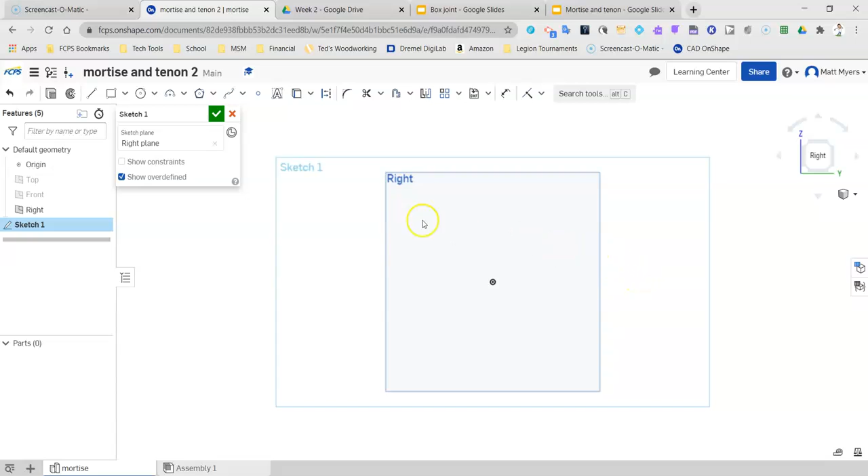To get started, I'm going to create a sketch on the right view. I'm going to hit sketch, and hit the right view, and hide my top and my front. I'm going to right click and hit view normal to sketch plane. Once I'm viewing my right view, I'm going to use my rectangle tool to draw the outline of my mortise joint, which is going to be 10 inches long and 3 inches in height.

Once I do that, similar to how we created the box joint, you're going to need to offset your outer lines of your mortise. To do that, you're going to hit O on your keyboard, and you'll see the offset tool lights up right here. You're going to offset the top and bottom by 1/4 of an inch.

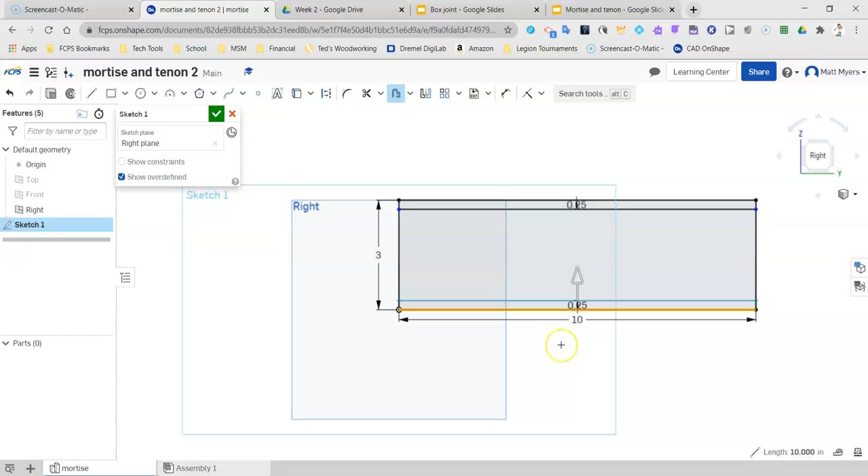So you're going to click on the top, hit Enter, and it's going to ask you to specify the dimension. You're going to hit Enter again, and then do the same thing to the bottom, except we need to flip the direction this time. Hit Enter, it's going to ask you to specify the dimension. Just hit Enter again.

And then what we need to do is specify where the mortise is going to be in relation to our ends. So we're going to offset the end by 1/4 of an inch, and that is the start of our mortise. Our mortise is going to be 1/2 inch wide, so I'm going to offset my end line again by 0.75.

Whoops, went the wrong way on me. So I'm going to hit O again, hit Enter, 0.75. And there we go, so this piece in here is our mortise.

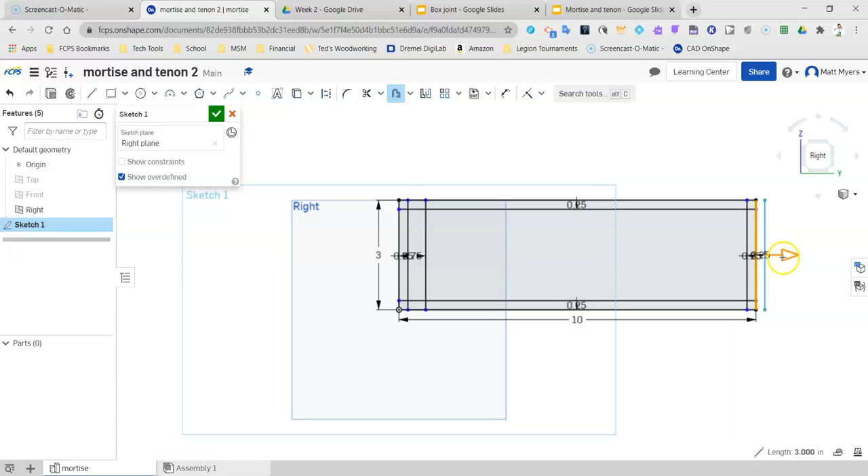I'm going to do the same thing on the other side. I'm going to click once, Enter. We're going to hit O again, offset this side, specify the dimension, 0.25. Then I'm going to offset the end again, flip the direction, and then 0.75.

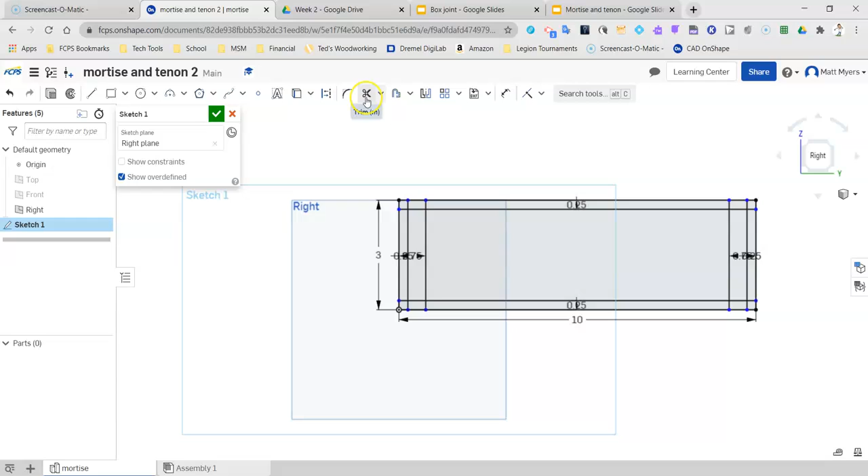So both of these areas are my mortises. The final step to do this, I need to trim out the lines that I'm not using. I'm going to hit Trim, which is this button up here, or my keyboard shortcut, which is M, and trim the lines that I'm not using. So now you will see that I have the outer shape drawn, and I also have my mortises drawn now.

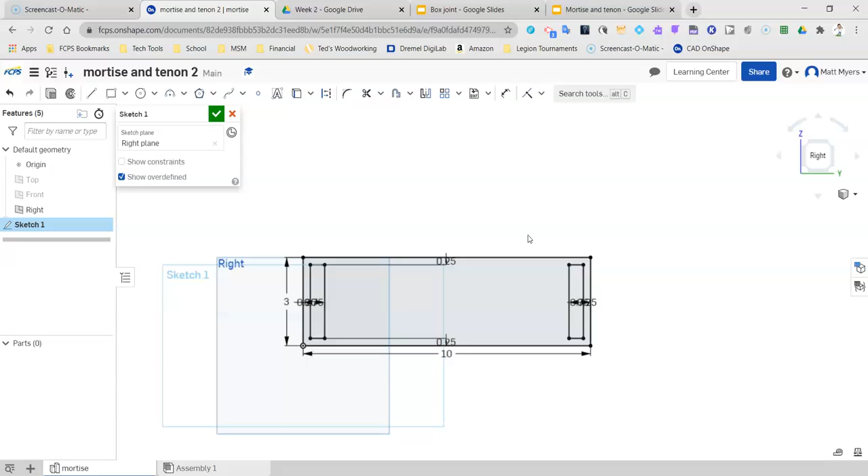So my sketch is complete. I'm going to confirm my sketch by hitting the green check, and then right click and view isometric. Now I need to do 2 separate extrusions here. The first extrusion I'm going to do is extrude this by 1 inch, and then I'm going to extrude this by 1/4 of an inch.

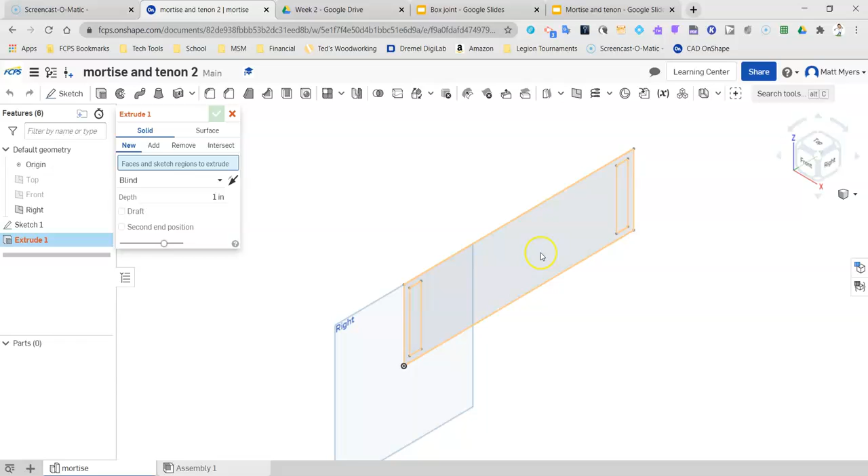So I'm going to extrude this by 1 inch, and hit Enter. Then I need to extrude - I'm going to hit so I can view sketch 1, hit that again, and then I'm going to extrude this part and this part. I'm going to extrude by 0.25.

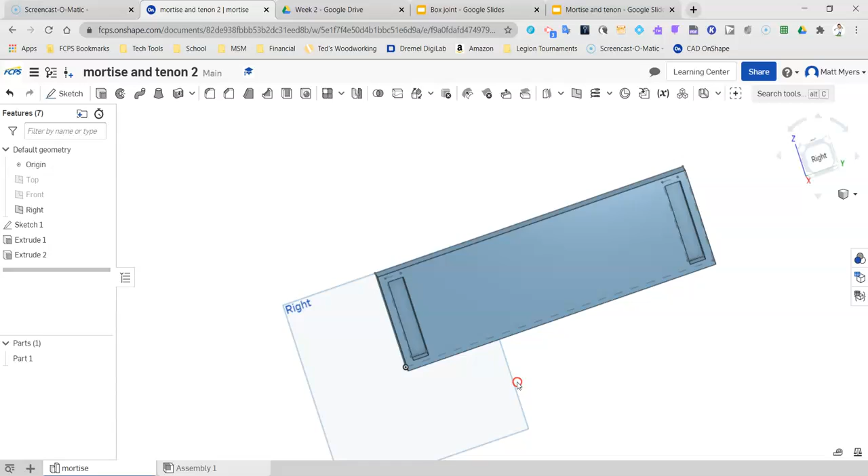Now if you view in there, you'll see that my mortise is cut out, and I know that the distance between the opening to the back of my mortise is going to be 3/4 of an inch. So there is my mortise.

Next I'm going to create my tenon. The tenon is the part that will go into the slot I just created. So I'm going to hit Insert New Element, Create Part Studio, right click and rename it tenon.

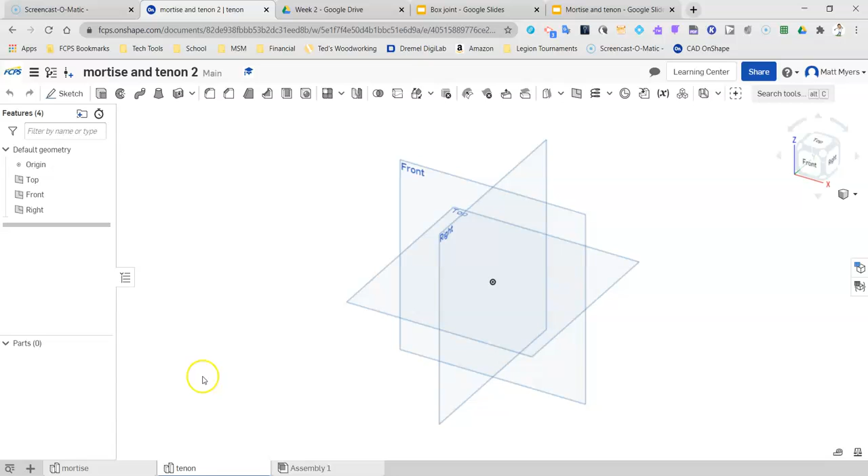This time I'm going to create my sketch on the front view. So I'll hit Sketch and Front, right click, View Normal to Sketch Plane, and hide my top and right side. I'm going to use my rectangle tool to draw the outline, making it 8 inches and 3 inches.

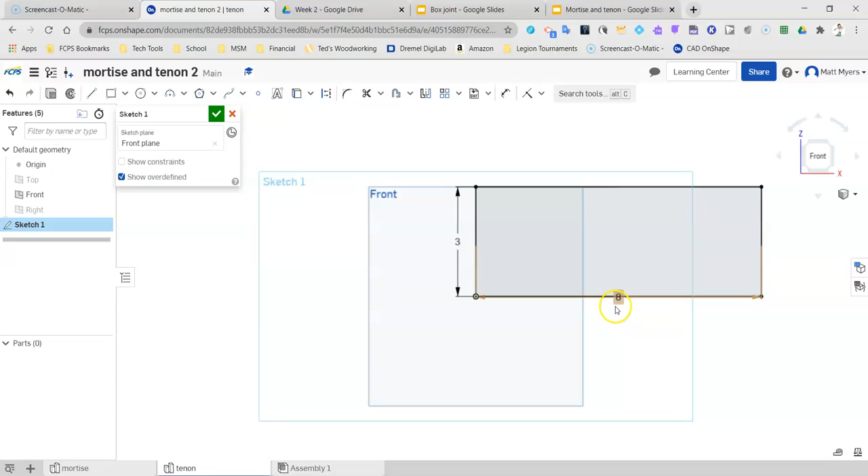I need to offset my lines, my top and bottom, to line up with my mortise joint. So I'm going to hit O, and offset by 0.25, since that is the start of my mortise joint.

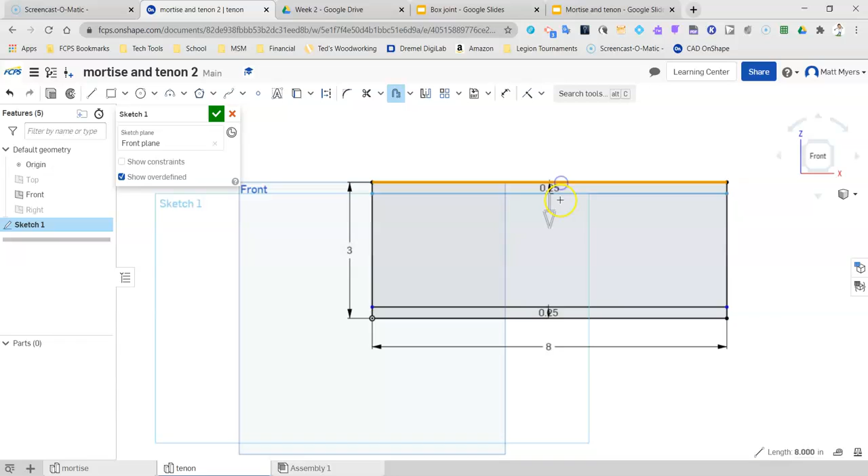Then I'm going to take my line tool and draw my tenons from where the points are that I just offset. My mortise is 3/4 of an inch deep, so my tenons are also going to be 3/4 of an inch, so they will fit perfectly. I'm going to draw a line that is 3/4 of an inch long, and it's going to come up to the top of the point I just offset.

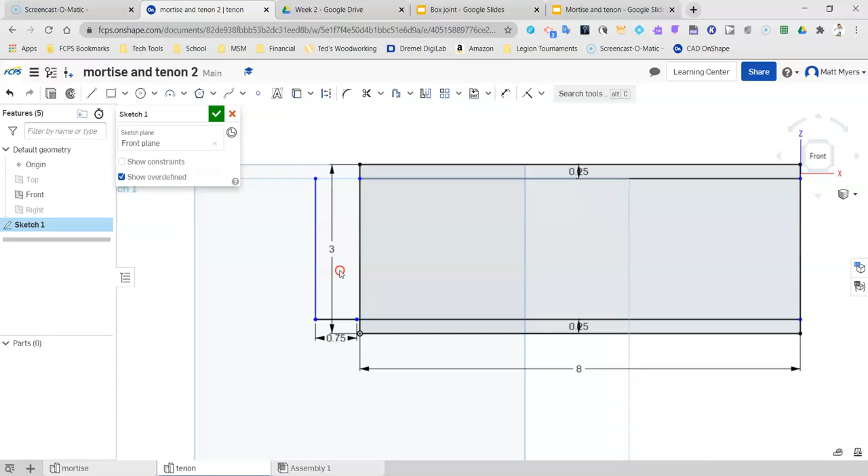Whoop, I messed up there. I did not connect my points, so let me go back and redo that.

Alright, so now we're back to square one here. I'm going to take my line tool and draw my line from the point that I offset, and it's going to be 0.75 inches long.

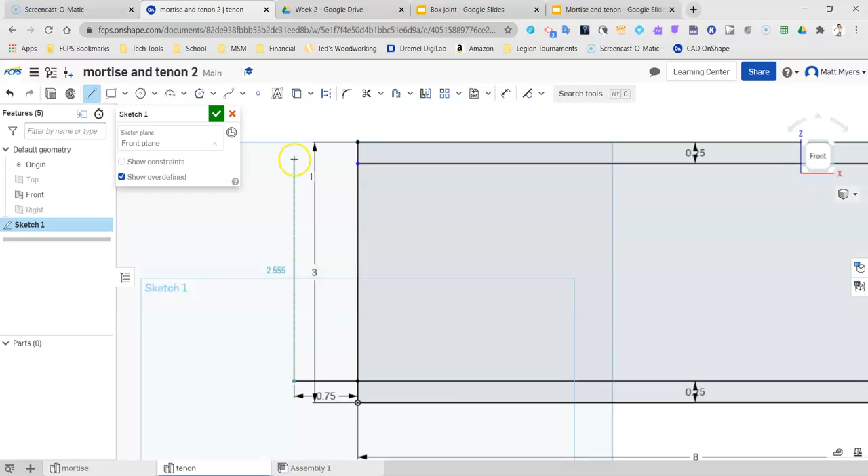And then I'm going to do the same thing on the other side. Take my line tool, start from the point that I just offset, 0.75, and come up to the point that I just ended on.

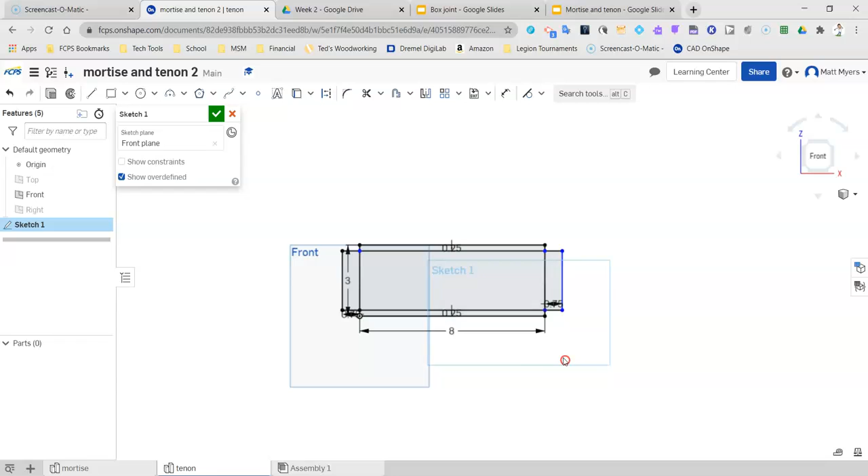The final thing I need to do is trim up the lines I'm not going to use. So I'm going to hit M, which is a shortcut for trim, and trim up these lines.

And you can see now that I have my tenons drawn, these are my tenons right here. So I'm going to confirm my sketch and view it isometrically.

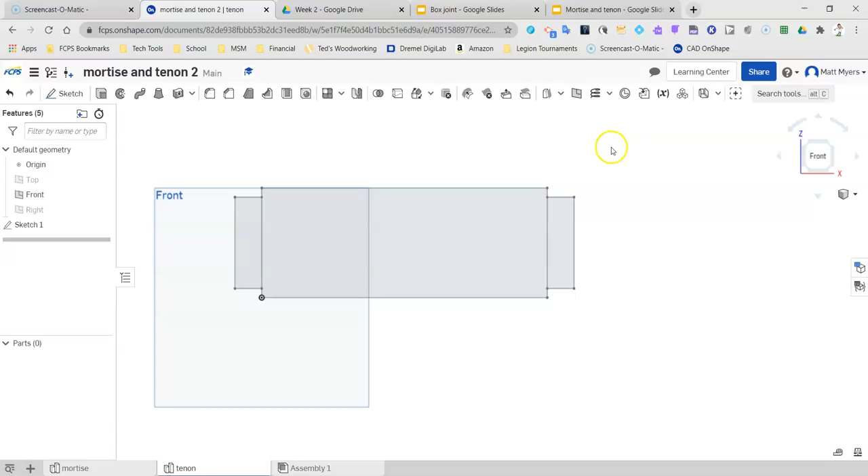And I need to do two separate extrusions here. The first part I'm going to extrude is just my rectangle, and the second part I'm going to extrude are my tenons.

So I'm going to hit extrude, and extrude my rectangle here, 1 inch. However, I need to make sure my tenons are centered.

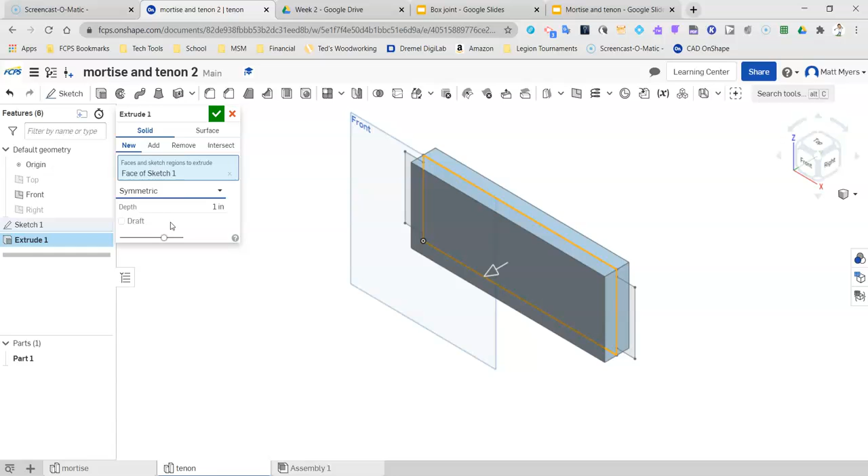So I need to extrude it by 1 inch, but change it from blind to symmetric. That means it's still 1 inch thick, but a 1/2 inch on both sides. So I'm going to confirm that, and then view my sketch 1 again by clicking on the eye.

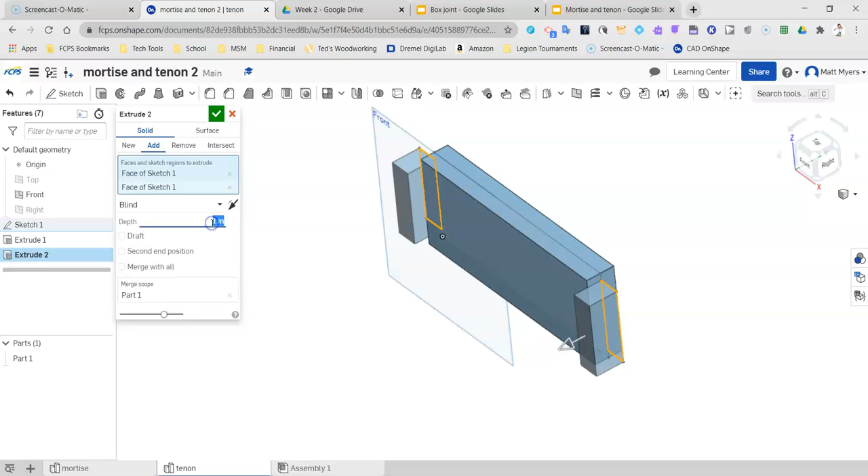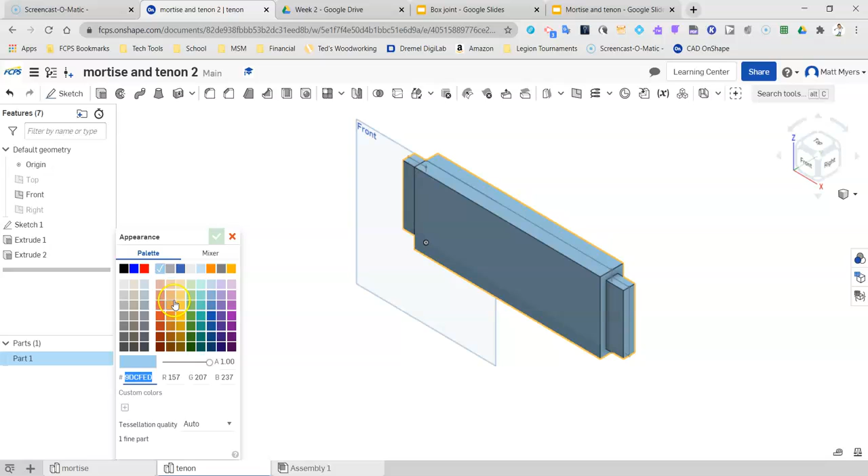I'm going to hit extrude again and extrude both tenons. Since my mortise was 1/2 inch thick, I'm also going to make my tenons 1/2 inch thick, but they need to be symmetrical, centered on my piece. I'll confirm that, view isometric, and then edit the appearance to change it to a yellow color so I know the difference in pieces.

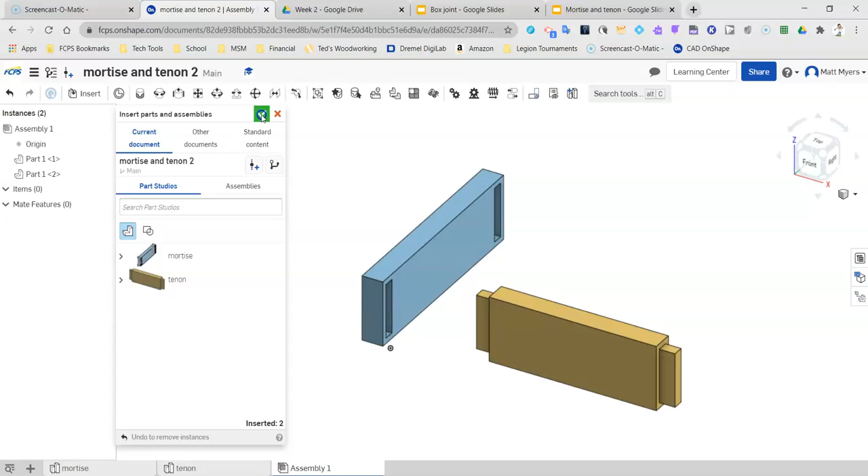Then it's time for assembly. I hit assembly, come up to insert, and insert my mortise, then insert my tenon. I'll click to confirm, and then mate this tenon to this mortise. Before I do that, I need to right click on the mortise and hit fix so it does not move. I'm going to rotate my screen and hit fasten mate.

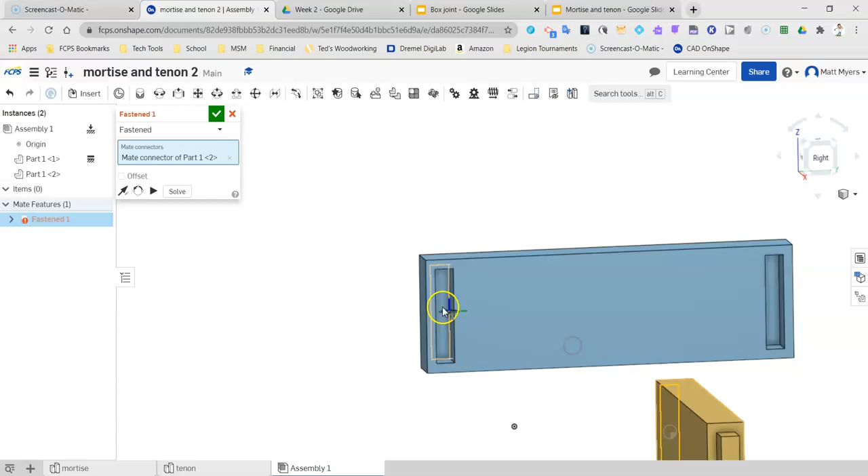I'm going to mate the center of my tenon to the center of my mortise. You can see that's a nice fit, because I made sure all of my dimensions were correct, and it fits very nicely in there. There's no gap. So then I'm going to insert another tenon and another mortise.

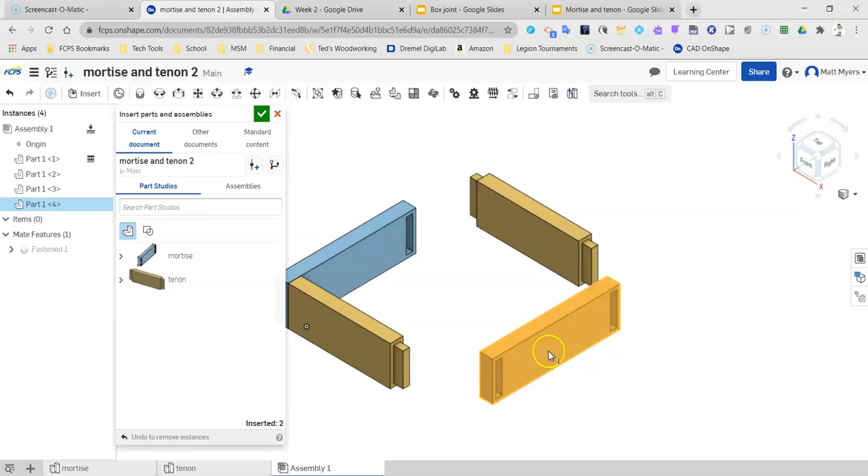Confirm that. I'm going to mate this tenon to this mortise here. So I'll rotate my screen, hit fasten mate, click on the center of the tenon, click on the mortise, and solve that.

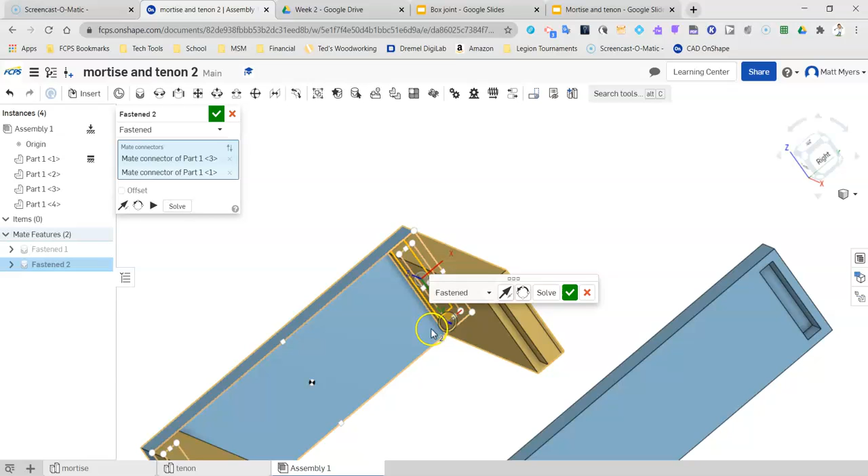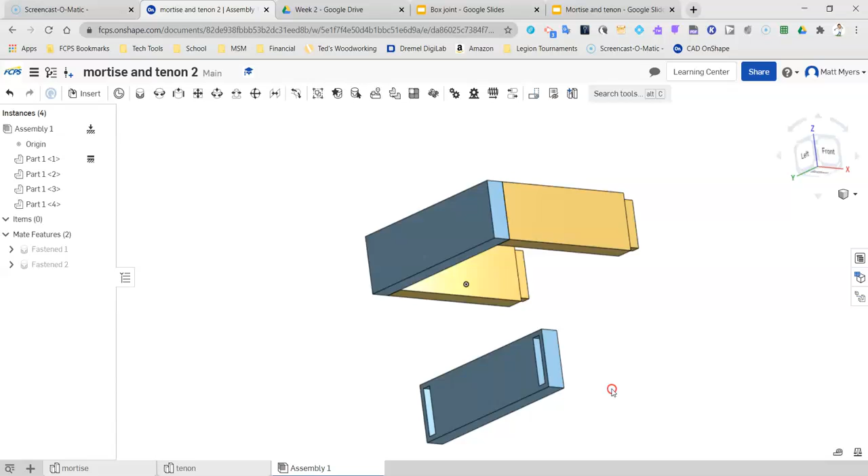The final thing I need to do is rotate my mortise. So I'm going to click on it and rotate it 180 degrees. Then I need to mate the mortise to the tenon, so I'll rotate my screen and click fasten mate.

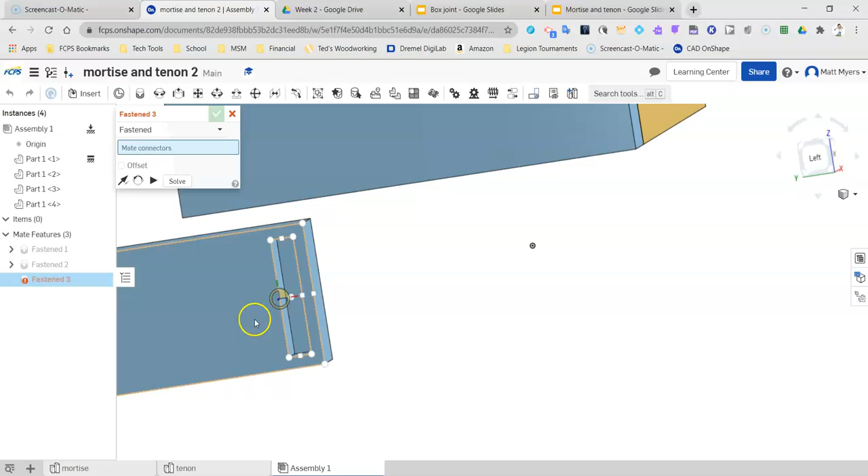One thing I forgot to mention: if you go to fasten mate and try to mate right here, notice how everything is highlighted yellow. That means you're mating the center of this surface, where we need to be mating the center of the mortise. So when you mate the mortise, you need to make sure that the only thing highlighted yellow is the outline of the mortise.

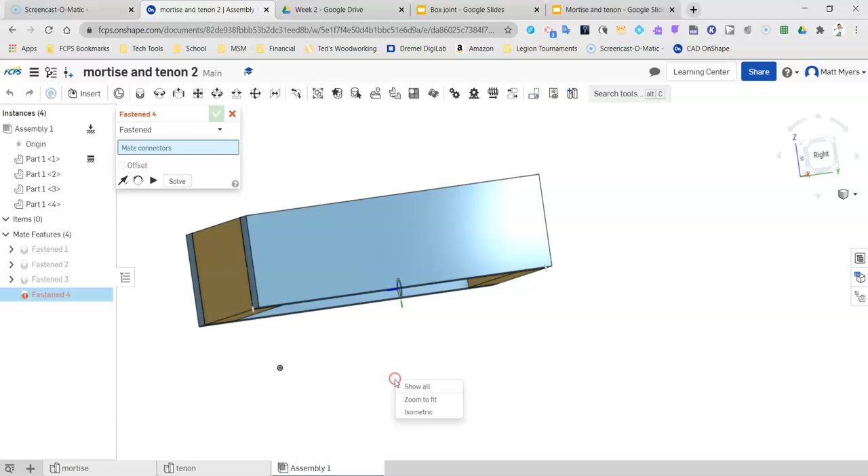I'm going to click the center of the mortise, then click the center of the tenon. Confirm that, view it isometrically, and you can see all of the pieces fit nicely together with no gaps. Again, this is one of the strongest joints in woodworking, and it's not that difficult to create. You can use a drill press and a chisel, or a table saw and hand saws, to create your tenons.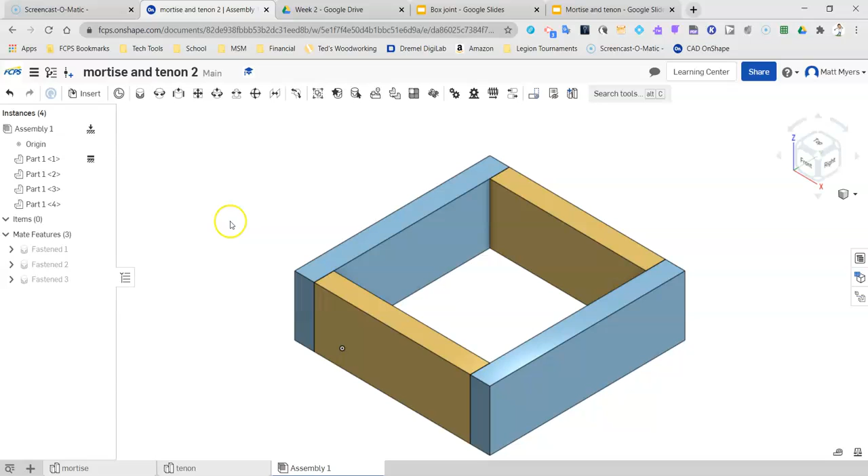So the final thing we need to do is create our drawing. I'm going to come down to insert new element, hit create drawing. Again, this is our standard template with no views. Then I'm going to insert the assembly, but I'll insert the isometric drawing first.

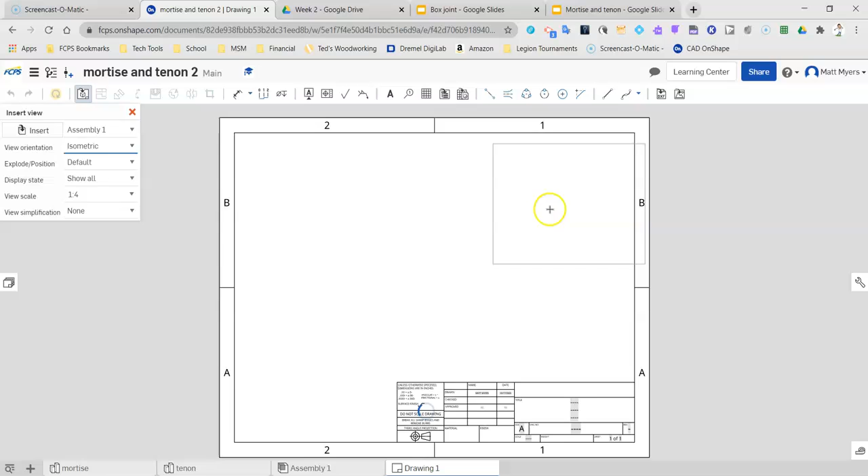Then I'm going to insert the front view and the top view. Then I'm going to insert the right view, so I'll go back to insert and change it from front to right - front view, or right side view, right there.

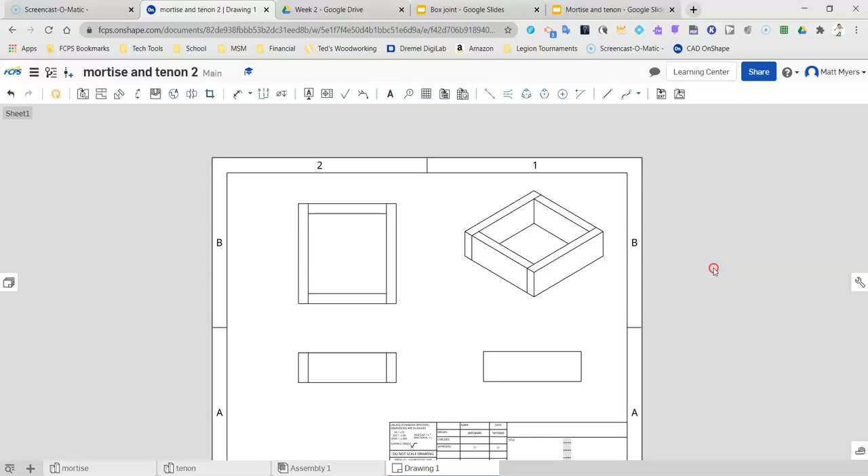Hit escape. The final thing you need to do: there are hidden lines here because you have the tenon going inside of the mortise. You know it's there, but you can't see it. So for each view, you need to go back, right click, and hit show hidden lines. You need to do that for each view.

Sometimes the view might be blocked. Show hidden lines. Show hidden lines. You can see that the dashed lines represent hidden lines - we know the tenons are there, but we can't see them. So we are using what are called hidden lines.

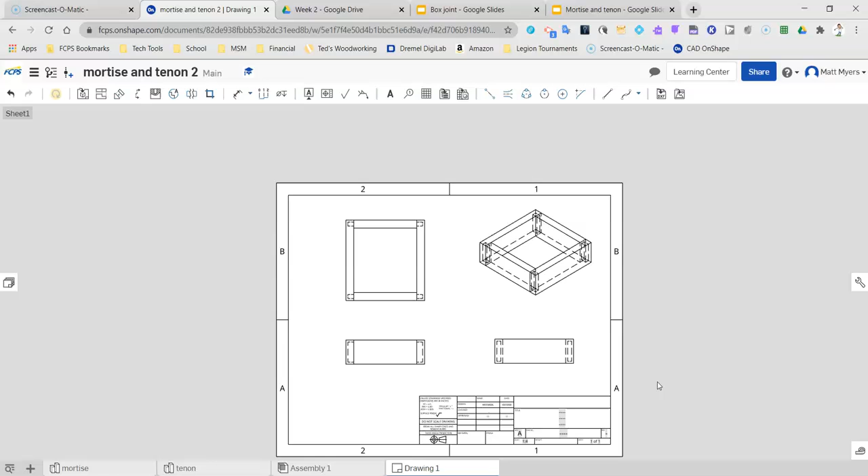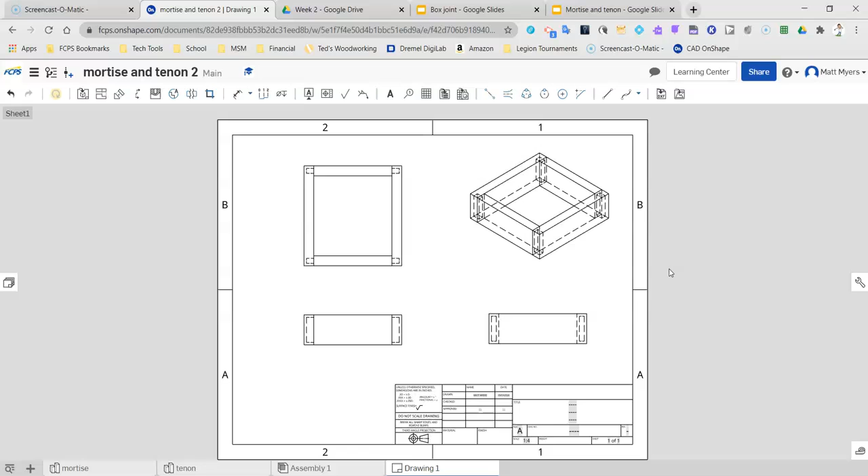In our next drawing tutorial, we are going to create the dovetail joint. The dovetail joint you're going to see is very similar to the box joint. However, there are a couple of extra steps that we need to do to create our dovetail joint.